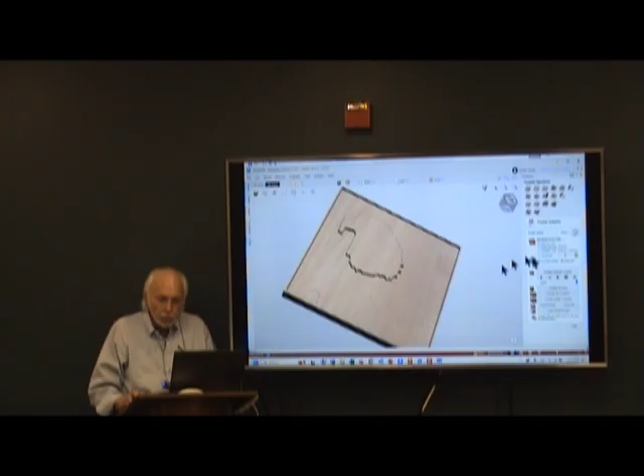Okay. Doesn't look like much. Let's go ahead and preview the selected tool path. Doesn't look like much. But if we look at it on the edge, you'll see that he's cut about 1/4 inch into the workpiece, and he's left some material here for the finer bit to handle. I'm going to close out of this for a moment. I'm going to put things nice and straight again. That is our first execution of the rough cut tool path.

Let's go into the fine tool path, and we're going to see the same four set of controls to determine what I'm going to cut. But I'm using a little bit different bit right now. Instead of the 1/4 inch end mill, here I, by default, went to a 1/16 inch tapered ball nose.

Now, of the bits, there's one in the set that you purchased, and there's one in the set that you have. Chris has a set also. This is probably the most expensive bit in that set. This is a bit that sells in the $50 price range, 50 something bucks. And it can do fine detail work, very fine work. So that is the natural bit that I would choose doing a three-dimensional cut.

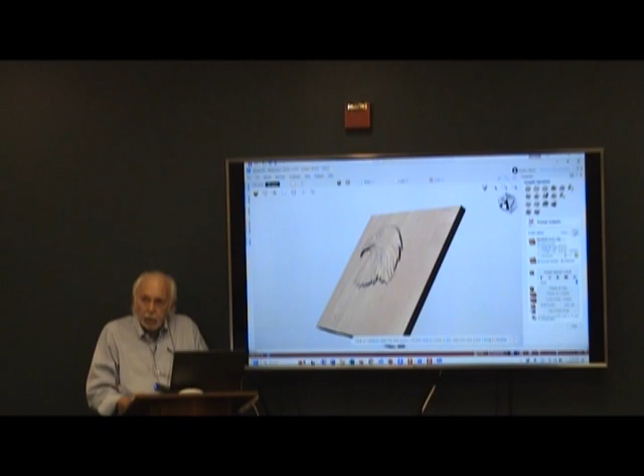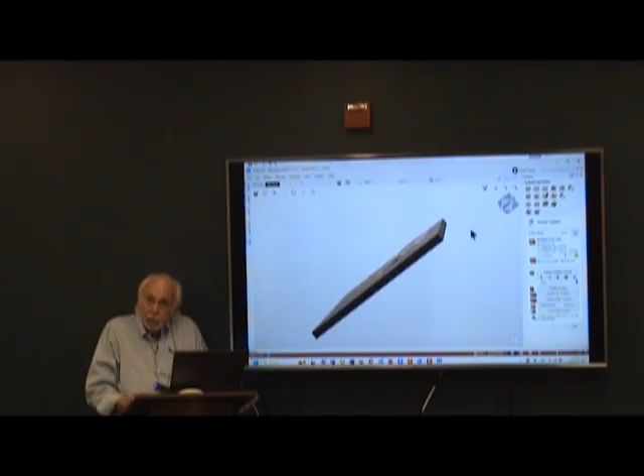Okay, I've got a three-dimensional object that's 1/4 of an inch above the surface of the material, and if I tilt the material, you can see the depth of the device. You can see that the material left is about 1/2 inch. Okay. That's the basics of three-dimensional modeling. That's the basics.

Now, it was really neat when I went through the animals in the clip art. Okay, each one of the animals came, as this one, as an individual component. It came in a dish, and by the way, that's really baked in a dish, so that they are only one tool path. Okay, one component. And then the one that has the jagged edge around. Of course, that one would create the least amount of dust.

Here, by going 1/2 inch into the total workpiece, I've created the most amount of dust, and the dish is somewhere in between. You know, there you are just cutting the material that needs to be removed. I should say the dust that needs to be removed from that material. So now this is 3D. These are the 3D capabilities of the tool, of the system.

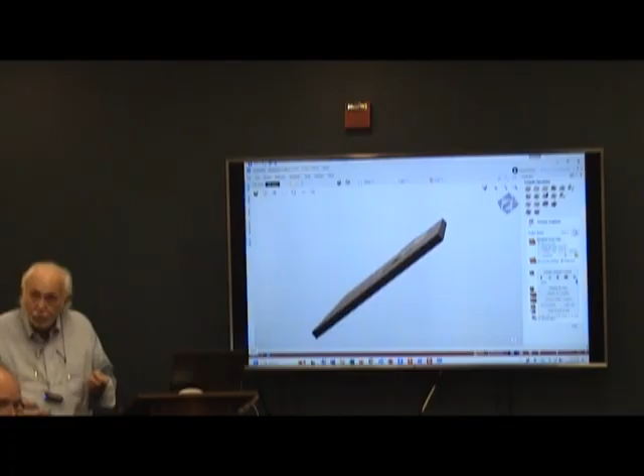I see a lot of questions. What if all I want is the eagle's head? I don't want any background. So in other words, maybe I wanted to make 10 of those and put them on 10 different plaques as I color them differently. Using the tools that I've shown so far, I can adjust the depth of the model. I showed subtracting from the standard 0.47 inch that comes from Vectric. I could increase that to 3/4 of an inch if I wanted to.

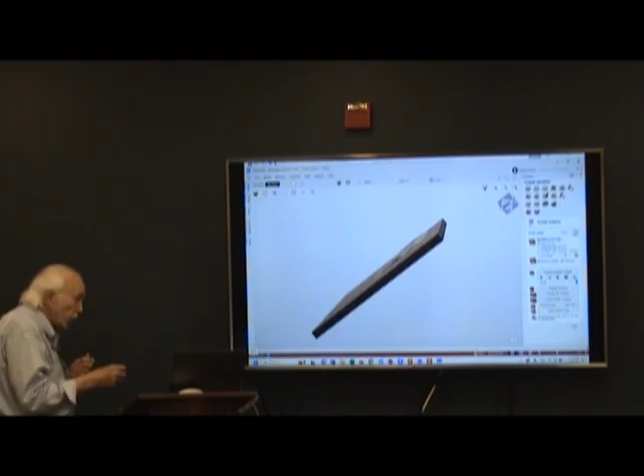Right. So yeah, I could easily, using a 1 inch, cut 3/4 of an inch down and run the bandsaw around it, okay? Or maybe I could draw a vector around and cut it on the machine as a profile cut. So just completely cutting, in this case, the eagle out of the material. Okay? Let me demonstrate that too. I won't fully demonstrate it. I'll show you the technique to accomplish that.

Let's go back into design mode. In this instance, I'm dealing with the differences between 11 and 12. I'm finding the tools in a different location than what I remember.

They've given us at the bottom of the design tab a set of modeling tools, and the one all the way to the left, let me get back here, get into 2D mode. I don't want that, I want that. I only want the component itself selected.

If I go back into the components, if I go back into the design and look down below this modeling tool, did you see the name pop up? It says create vector boundary around selected components. Here I have the selected component, and here I select that tool.

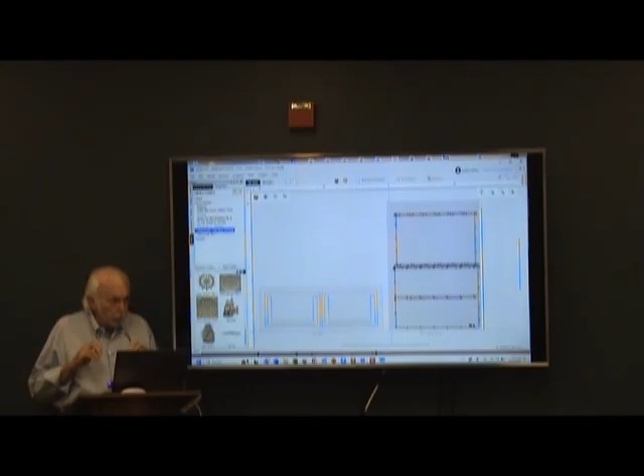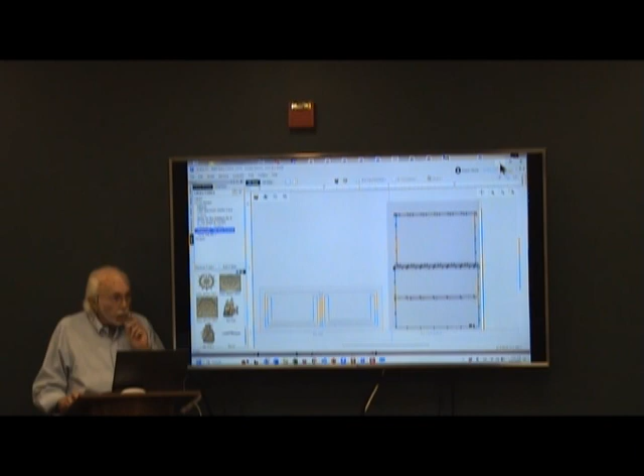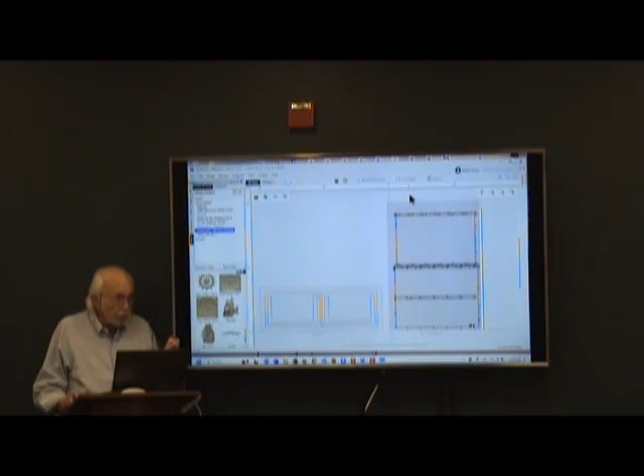I told you last week that it's feasible to export a three-dimensional object from Fusion 360, and I talked about how that could be used inside of Fusion, inside of design and make. Let's just go through that process real quick so that you've seen it.

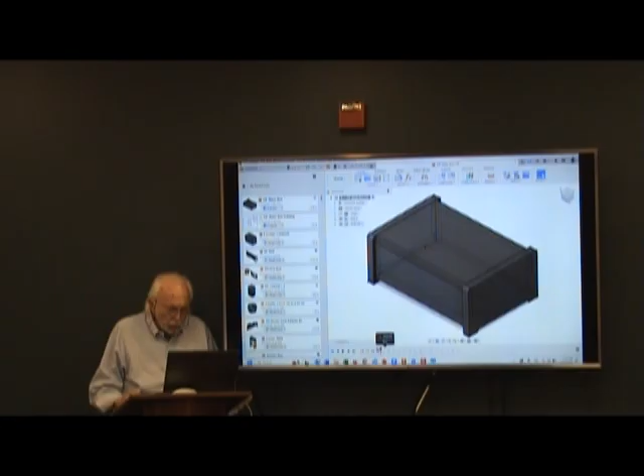In Fusion, I simply set my timeline back to where I only have the left side of a box. Pretty straightforward, left side of a box. In Fusion, I just went and exported it.

I exported it, and I chose—he doesn't like the file name. It's a non-standard Windows file name, and he's just telling us up front. I chose to export in STL file format.

Paul, last week we talked about the STL file format, and it happens to be a surface modeling system where a series of triangles connected together define the outer surface and any inner surface of a three-dimensional object. But I just called it simply boxside.stl. I'm not going to repeat that here, but I'm going back over to Vectric.

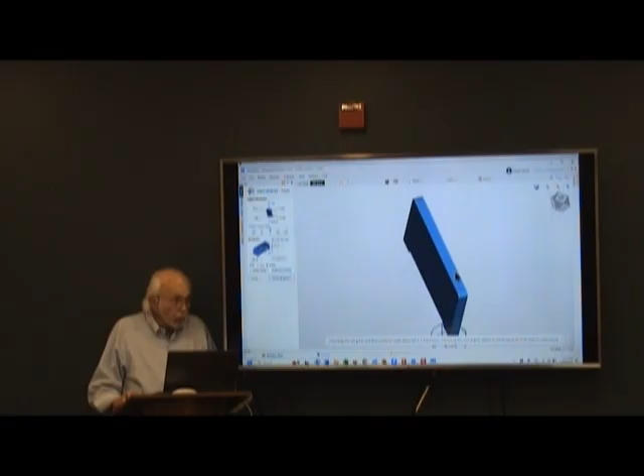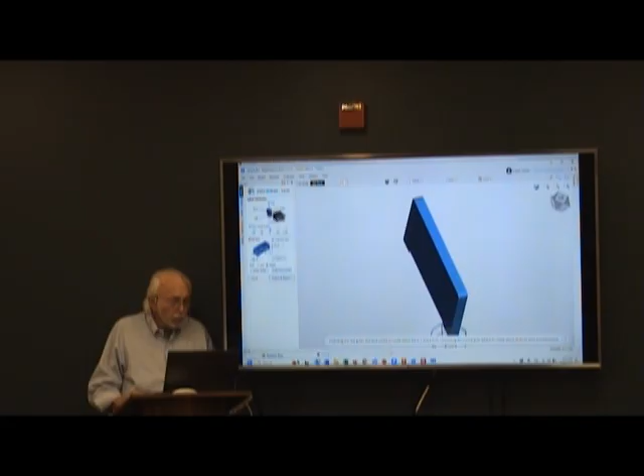I'm going to open the basic boxside.stl file. Now that's bringing a three-dimensional object into Vectric. Of course, at this point in time, Vectric knows very little about the dimensions of this object. It just knows, looking at the STL data, the shape, and it knows where it has a mortise cut in it.

There are tools available in the Vectric software to adjust the dimensions of this file we've imported, of this object we've imported, to set it up inside of Vectric with the right thickness and other dimensions. It turns out that one of the homework assignments tonight will be a Vectric presentation on doing just that for a little statue. And the statue happens to be—let me back out of here for a second.

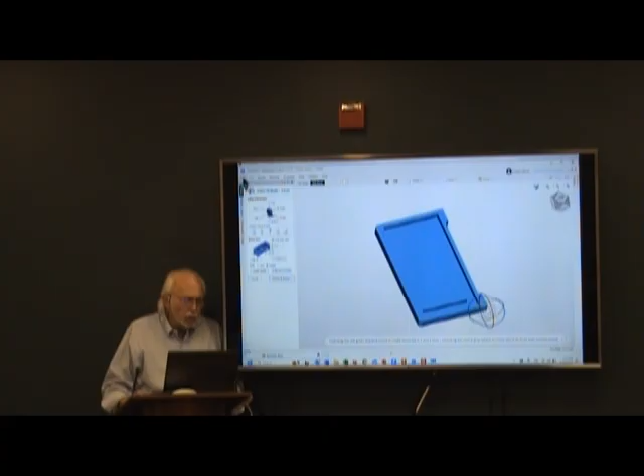Okay, I'm going to do another load using the same icon, but this time I'm going to select a file that ends in the OBJ format.

Okay, so now I've brought in a little statue of a marlin jumping out of the water. The same process would be ahead of me as with the box side. I now have to adjust this model to where it would fit where I want it in a piece of material.

And then cut it as a two-sided object. The Vectric video to import this particular object and convert it into a two-sided cut is part of the homework tonight. I've demonstrated the practicality of taking a model out of Fusion 360 and bringing it into Vectric, and the practicality of grabbing an object from industry someplace and bringing it into Vectric. The details of the homework tonight will take you through the process of, once you get it into Vectric, how do you go about making it into a tool path?

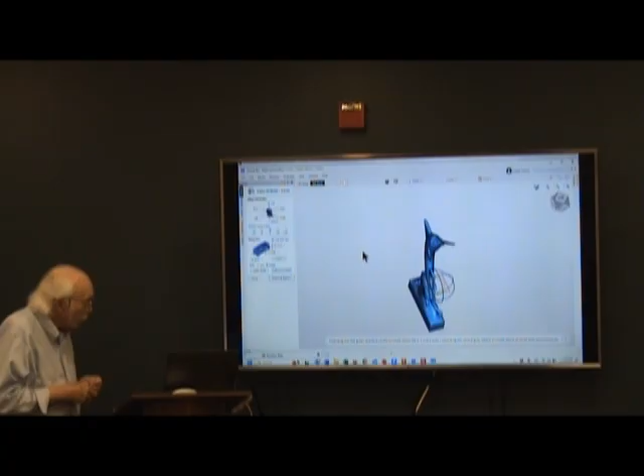Going back to my guidelines of what we want to speak about tonight, I've talked about vector imports, and I've shown you the available box designs on joesboat.org. By the way, a high percentage of those pre-configured boxes are three-dimensional work. I promised earlier that we would talk about manipulating 3D models and doing some merges.

The ends, there's some cleanup work left to be done here, showing a three-dimensional rose on each end of the box. Here is the cut of the box front, back, and top. On the box front, a floral design, I picked it because I thought it was appropriate for a wedding here on the front of the box. And then for the box top, I chose a design coming from a video that's out there on YouTube.

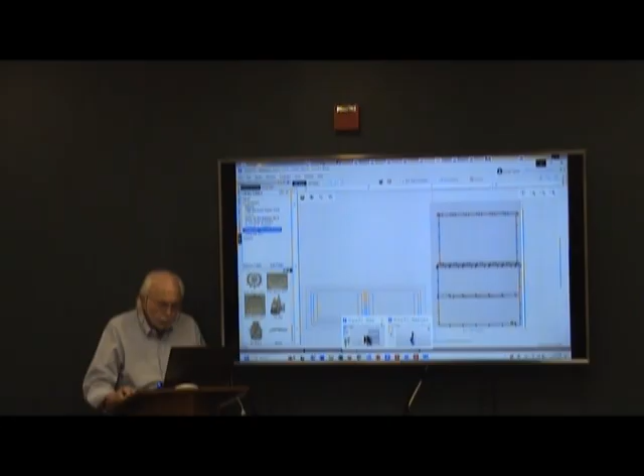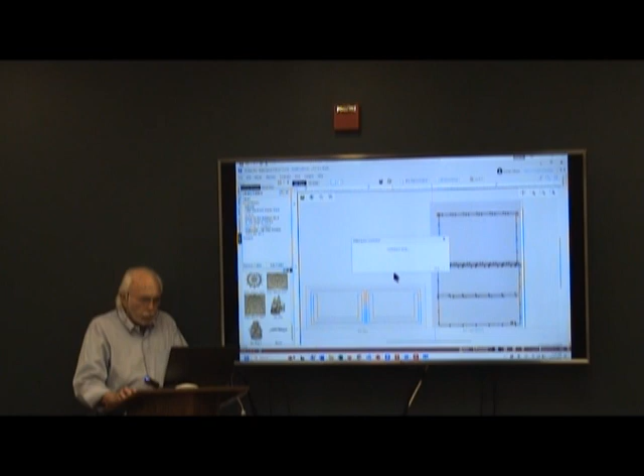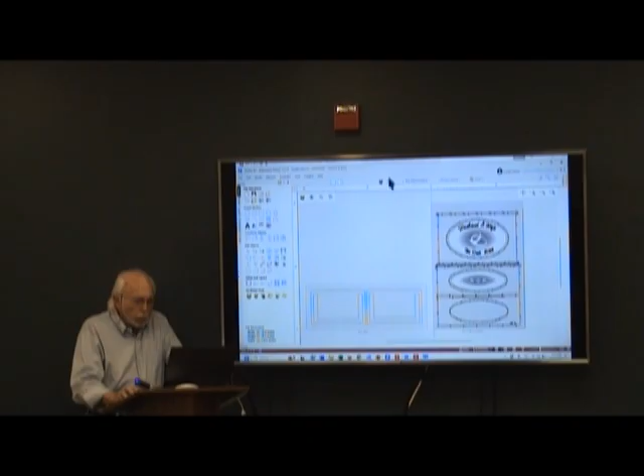That's not it. Okay, just to synchronize here, we've got the floral pattern on the ends of the box, and simply an oval around it so we can V-carve a ring around it. Now this is simply loading that design and make object, which comes with the dome, and similar steps to what I demonstrated earlier. When I go over to the tool paths for these two ends,

oh shit. Technical term? Yep. Maybe we'll create a few tool paths here. I was worried about filling up the time tonight, and those worries were nothing.

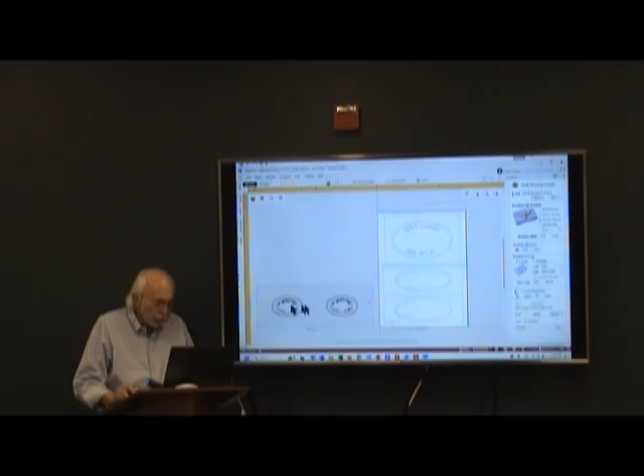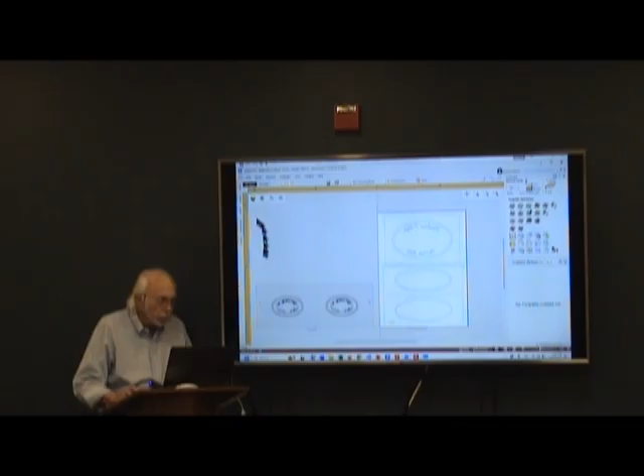Let's go ahead and create a tool path. Let's see. Keep in mind there are two sheets in this file. We covered sheets 2 weeks ago. I have a sheet for the box ends, and I have a separate sheet for the top, front, and back. Here I'm just simply going to select the two roses, and I'm going to open up a 3D roughing.

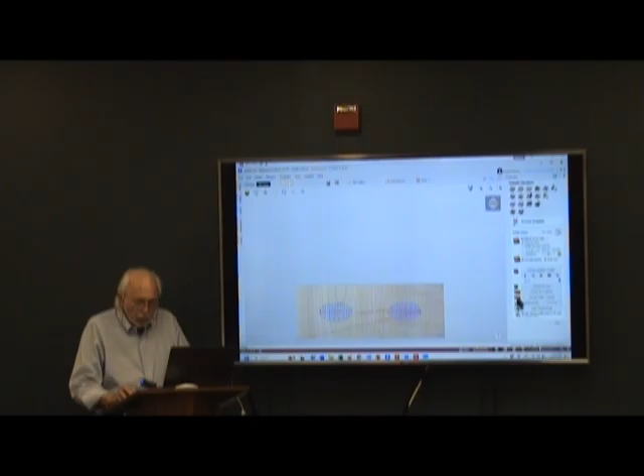And here I use selected level. Level 1. They're both in level 1. I have level selected here. Let's see what happens when I calculate. Okay. This is the roughing tool path. And I preview it, showing you just a gross outline. If I close out and I go to the 3D finish, and I go into 2D, and again I've selected level 1, and I go through the calculate, and then I do the preview.

Okay, it's going through. Now there were some questions earlier, and I can do this for either the finish or the rough cut. I think it's the same. Let's do the finish. The two patterns that we discussed are offset and raster. Now, raster, of course, is the one that's going to go back and forth, and you can choose the angle. Here I chose 40 degrees, but let's choose 90. And that should change the direction it goes across the wood. Let's go ahead and calculate.

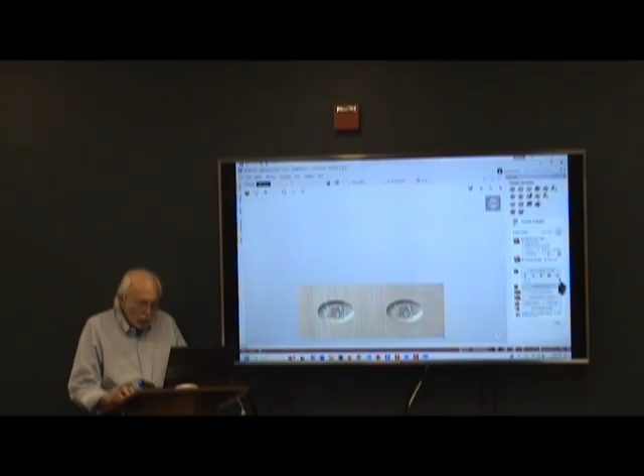And now this is a finish tool path, remember. Let's go ahead and slow down the cut, and then do the preview. I didn't slow it enough. Maybe I did. Let's speed it back up so it'll quickly finish. What happened is I did not reset the preview. Let's go ahead and repeat that. Let's slow it down. Let's say preview selected tool path. And now you can see how the cut is occurring. It's at the 90-degree level, and it's going to go right to left over the entire design. You can see the rows beginning to appear here.

Because I'm doing this in the simulator, I really don't care about the rough cut. There's no chance I'm going to dull or break this bit. I mean, it's going to occur in the virtual. Okay, so of course, let's speed it up.

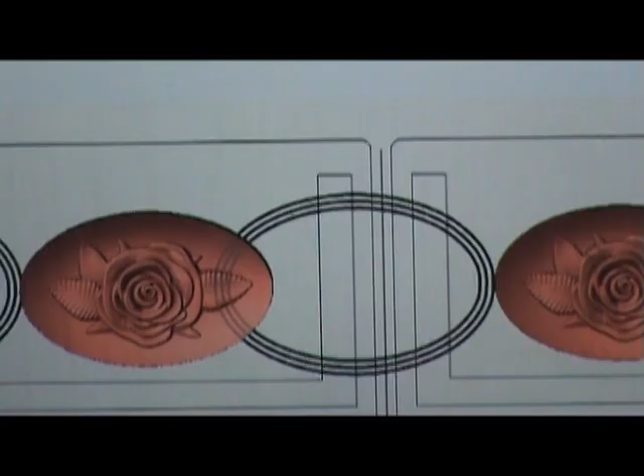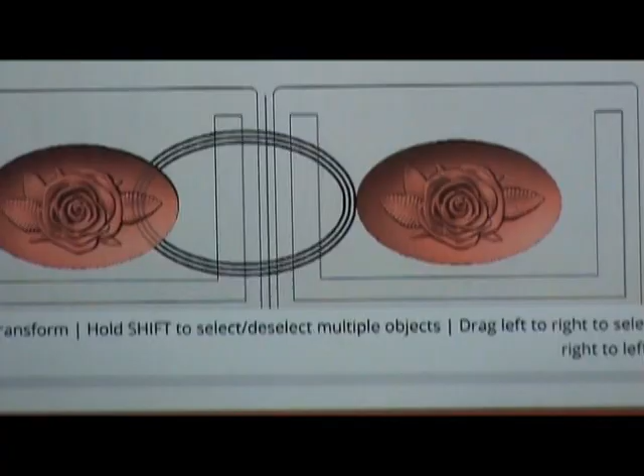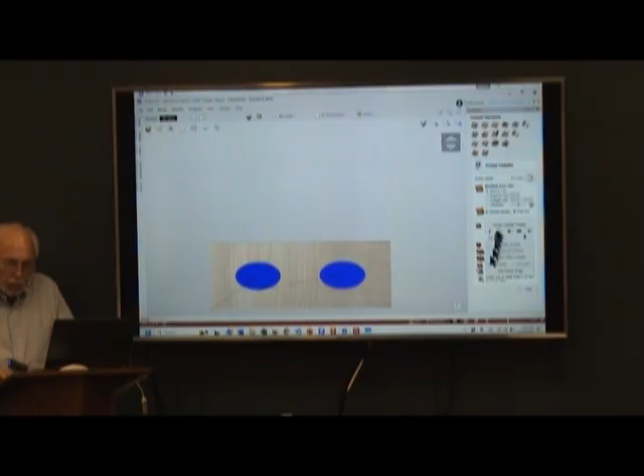Now, just for demo purposes, I'm going to redo it, and I'm going to choose the offset pattern. Notice it's showing a circular pattern. And I'm going to calculate it. I'm going to reset the preview again. And now let's go ahead and preview that tool path. So make sure it's slow enough here. You can see it starting from the center, working its way out. Okay.

Don't believe the predicted machining time for these tool paths. Multiply it by 3 or 4. These are long jobs, very long jobs. Is there an advantage of one over the other? I haven't found it. I have not found it. Speed isn't one of them. Maybe if you use both of them, when you go to the cleanup, is where you might see the differences.

The circular patterns, you might not need to sand as much with the circular patterns as with the diagonals, but I truly don't know. Okay, so here we are. We're just cutting straightforward design and make components.

It gets more interesting when we get over to the box top. And let's close out of here. Let's go back over to, from the box sides, let's go to a different sheet and get into the box top front and back. Here we are in the 3D view. And here's where we do not have, let's get one. We do have tool paths.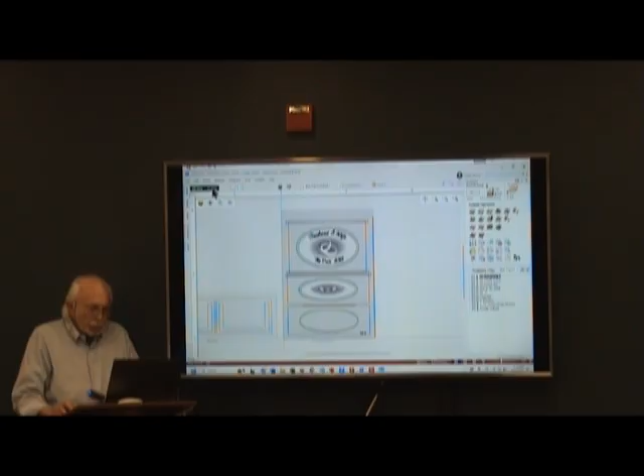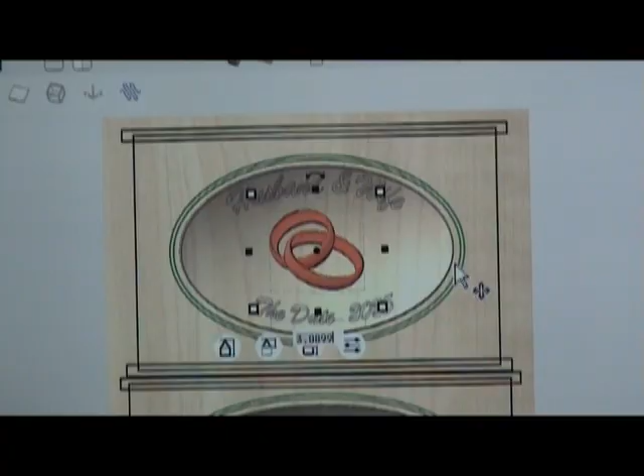I'm going to start in the three-dimensional view because we've covered already several of the controls. When I select in 3D view and do a second select, I have a similar set of controls that I've already discussed. Here, the pattern for the rings, let's get some detail here. I got 3 inches high, the rings, and I've got 2.6 inches high and 3 inches wide. That is the component for the rings. And as I said earlier, this is just a standard clip art that you can easily load.

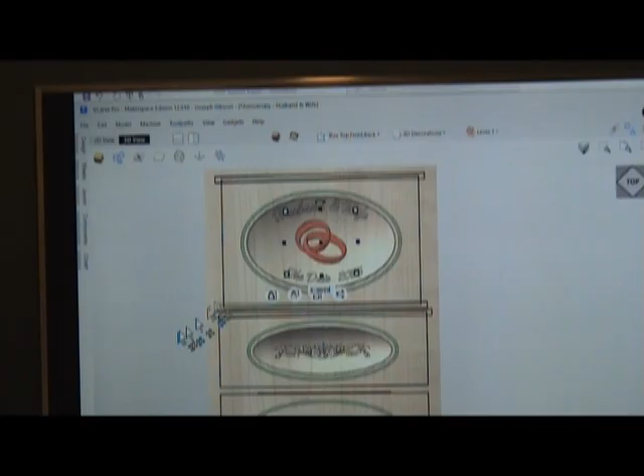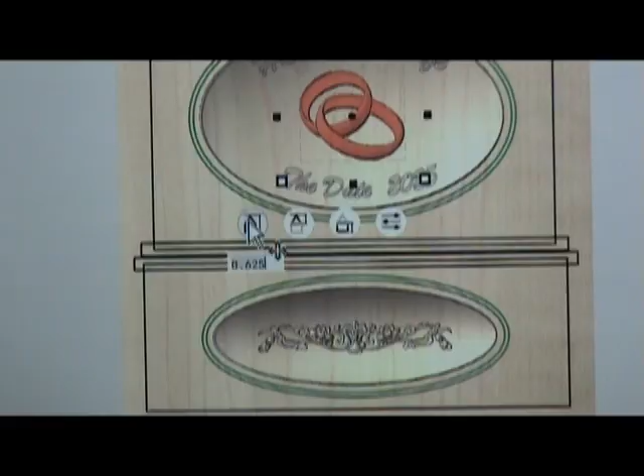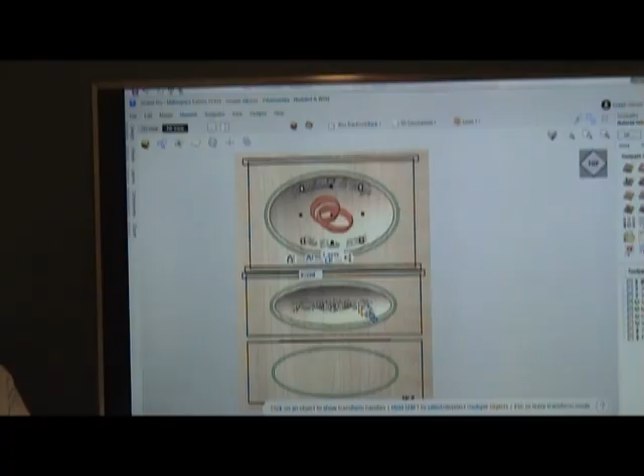Down below, if I look at the details of this, that component is 0.625 inches high. And if I look at the total for the rings is 0.125 high. Doesn't make sense, right? Doesn't make sense. I don't try and modify them. This is the point I made earlier. Just accept them at face value. If I look, now I'm just showing the component for the rings itself.

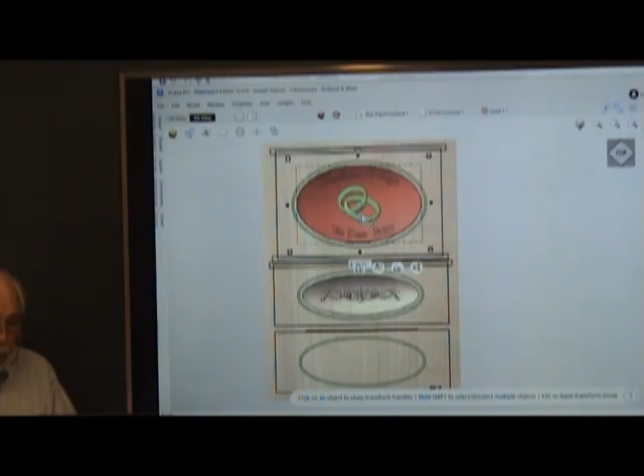If I move away and I focus on the dome, which is inverted to become a dish, we'll talk about that in a few minutes. Here I have a width of 8.96 inches and I have a height of 5.55 inches. And then if I look, I'll select them again, if I look at the thickness, it says 1.825 inches. Don't believe that. Don't believe it. But it works. And if I look at the total, it's 0.4 inches. Okay? It works.

Earlier, when we were talking about the eagle, I went through these controls, I skipped a control called the base height. Okay, now think this through. For a given component coming from Vectric, it's going to have a standard width and height, and it's going to have a standard thickness. Now placing that in the thickness of the wood, I used the defaults earlier, which work, by the way. And for a single component, it's rather easy.

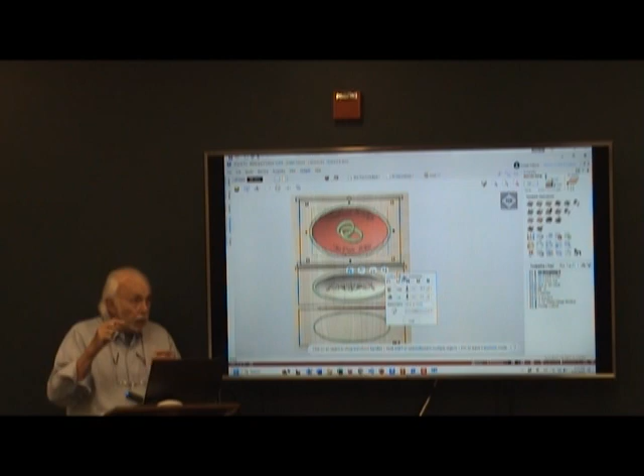The base height of 0.25 might make sense, or a base height of 0.375 might make sense. Halfway up the thickness of the wood, okay? And then on top of that, the height of the component itself. You see the tools we're going to manipulate to build the composite component that you want for your project. Now, for simplicity's sake, for me, I got to make it as simple as possible. I'm choosing to work with 2 components.

But there are no limits. You can put together designs with multiple components. Say you're not dealing with a box, but you're dealing with a plaque. Yes, you can load that plaque up with little components, which the videos tonight will do. They will walk you through the steps of building a composite set of components from multiple objects.

Joe, you haven't talked about the lettering there. Since it is now a bowl-shaped surface, do you have to do anything additionally to the letters? Let me talk to that a little bit. I will talk to that. Okay.

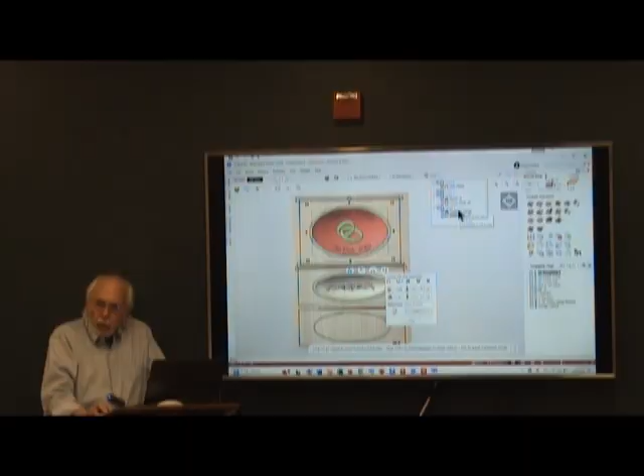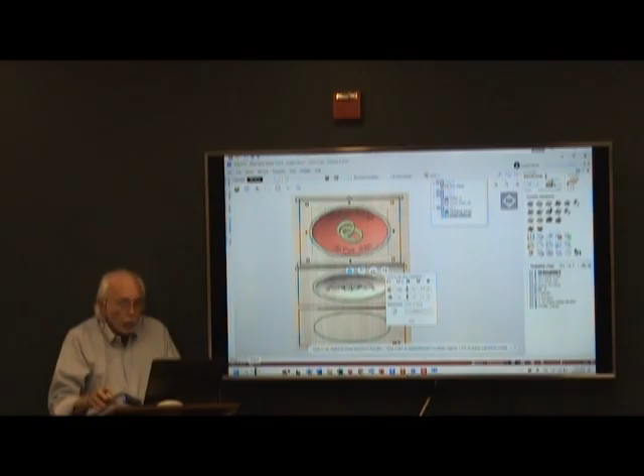When I look in the component tree, the dome dish 30, right beside it, there's a U. When a dome comes out of the box, that is going to be an inverted U. The act of turning it over inverts the dome to become a dish. And this particular one does not have any color to it. It's simply black and white.

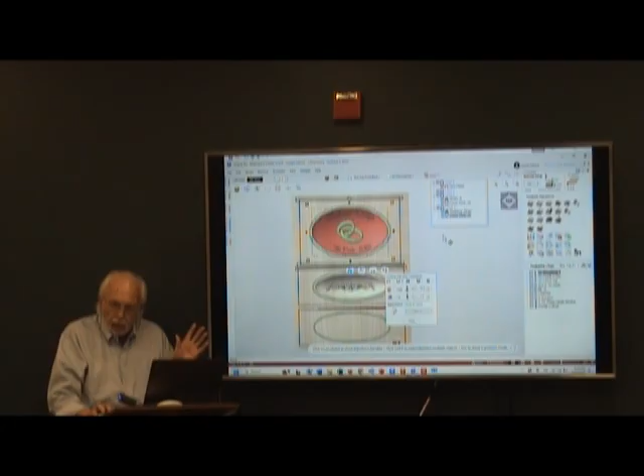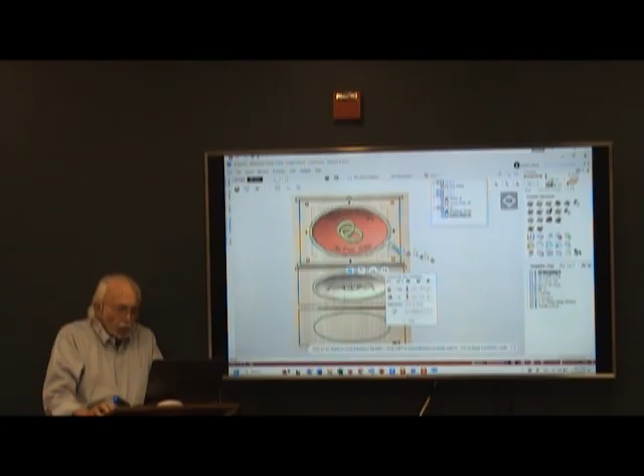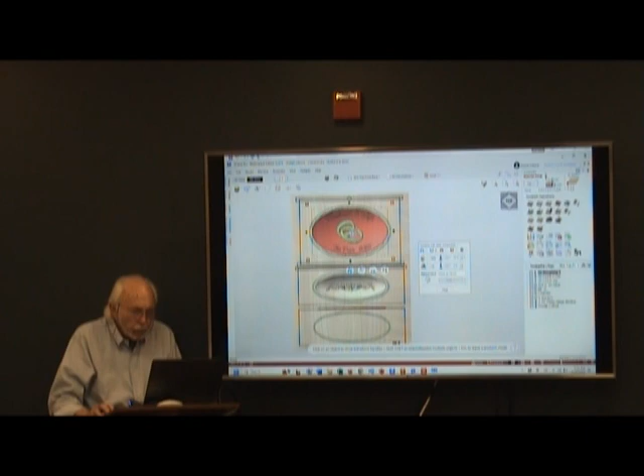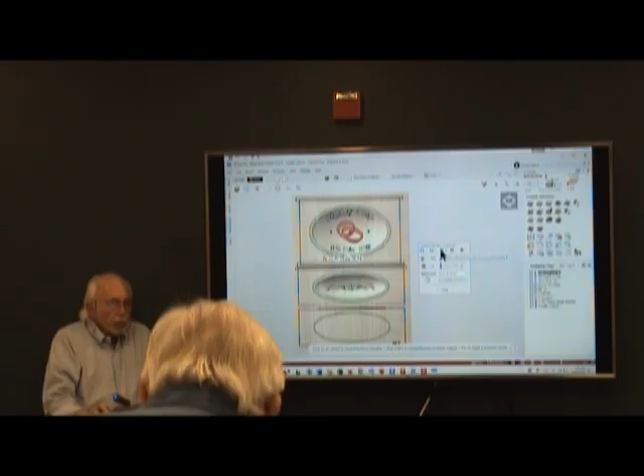And by the way, if I go back over... Now here I get version 11 versus 12 issues. And instead of going to the left-hand set of controls for the currently selected... okay, the rings. Notice the rings themselves, instead of the plain black and white, we have the color, the greenish yellow color. As I have an inverted dish, the color indicates this is a merger of a component on top of a dish. And there's conversation in tonight's homework that will get more detail there in the flat inserted versus the merging in.

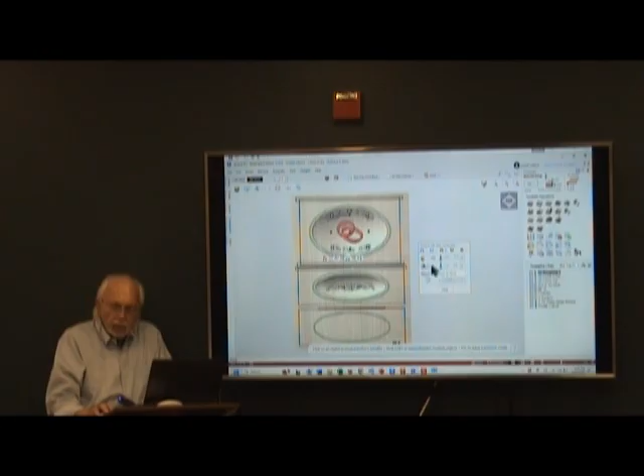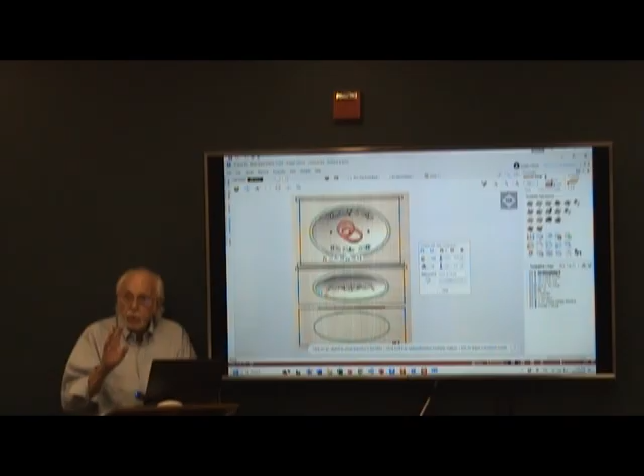Okay, this is the new method of manipulating the details of a component. In addition to specifying how I want that component to be recognized as either a base unit or a merger, I can also fade and tilt. The tilt gives you some very, very tiny degree movement of a component up and down. Is up and down the right word? No, back and forth. Technically, they believe they can make one end of a component higher than its normal position. And the fade, of course, is also not using the full component, but getting rid of some density there.

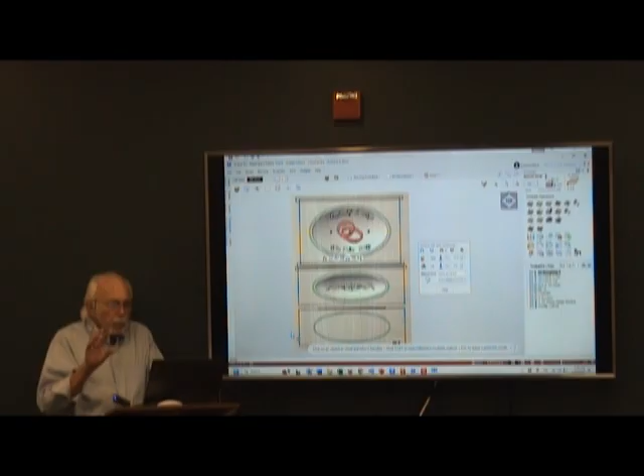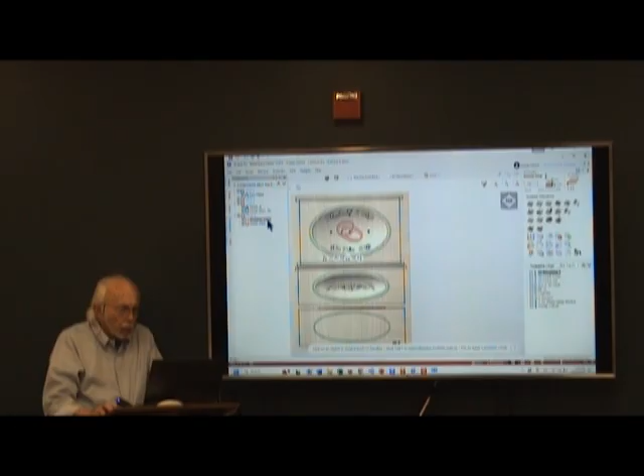Let's close out of this, and I want to fully close it. Go back over to the components tree. And here it's the same thing. If I go focusing on the wedding rings, I've selected it as I did earlier, but now instead of having the pop-up dialog box, I've got all the dialogue here in the left-hand column. Now, for an individual component, I have a selection as to how it's to be merged in. But notice they sit in layers. I got layers 1, 2, 3, and 4.

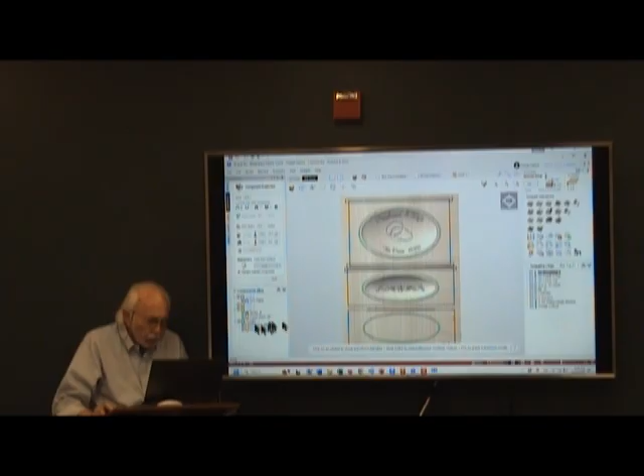The layers themselves, the levels themselves, also have a combined mode control. Add and subtract. Add would be the upside down U. Subtract would be the U itself. I have a merge, which I think is an upside down U, and I have a low, which is... I forget which one. Where earlier we looked at the icons, the U with or without color, or the upside down U with or without color, here at the layer level we're using add, subtract, merge, and low instead of the 4 different icons. And we're adding the term multiply. Between layers, in this particular design, there is no multiply. They're all pretty straightforward inverted U going up.

But in the homework tonight, there will be conversation about using the multiplier effect between levels. There will be a multiply effect that can manipulate the depth of a component so that it stays within a particular set of parameters. And I'm not sure I can fully explain it to your satisfaction, so I'm going to say, wait for the video tonight. And I'll point that video out.

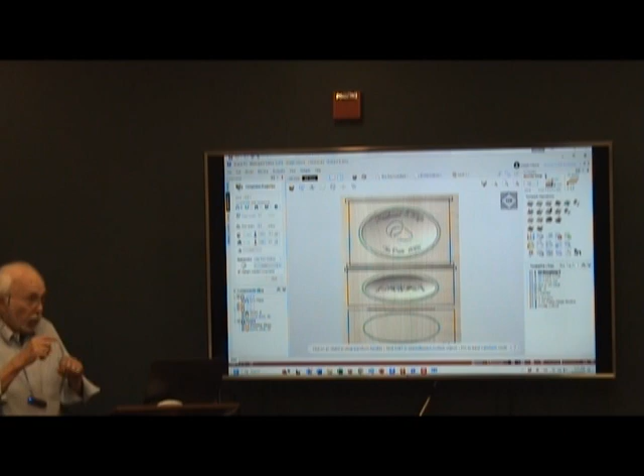I'm serious. The videos you'll watch tonight will describe the zero plane as a reference point for the surface of your composite model, and it is to help the software understand where that model should end. You'll hear those words tonight. You will not find that backed up in documentation. Okay. All right.

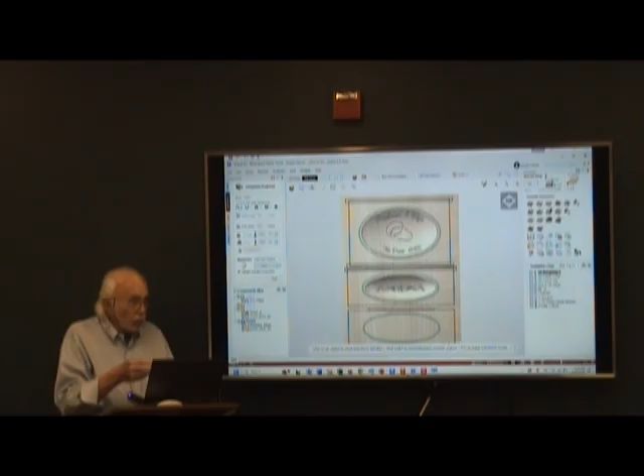So we have covered the level structure. Through talking to the level structure, you can see how it's used. I've put a composite model at one level for the box top, and a second composite at a separate level for the box front. And then the software, as it merges things together, will pick out levels as needed by the tool paths that we create.

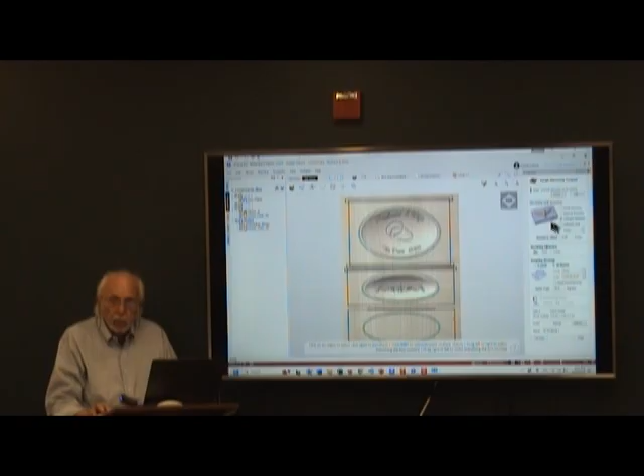And here I get over to the 3D tool paths for the anniversary box. The 3D roughing 1, finish, and finish top. Let's take a look at the 3D roughing 1. Okay. It is selected vectors, and there is a faint magenta line around husband and wife, and there is a faint magenta line around the floral pattern. So I have a tool path that does all of the roughing work for the front of the box and the top of the box.

And let's close out of here, and let's go to the 3D finish. Here we chose to do a 3D finish for the front of the box. And if you see, we are choosing selected level here. So anything on level 2 in the tree will be handled in this tool path. Back out of here and go back into the finished tool path for the top of the box. Again, we're doing selected level, and I think you're going to see this is level 1. Okay.

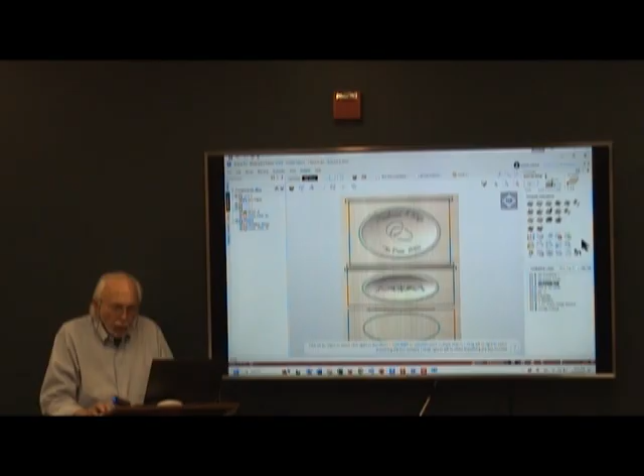Now, if I go ahead and exit out of here, close out, recompute everything. I've got an error. It doesn't like the total thickness of the model, and I'm going to see if I can cut it down to 0.625. Apply. And it took it. So close out. And let's say OK here. Recompute everything.

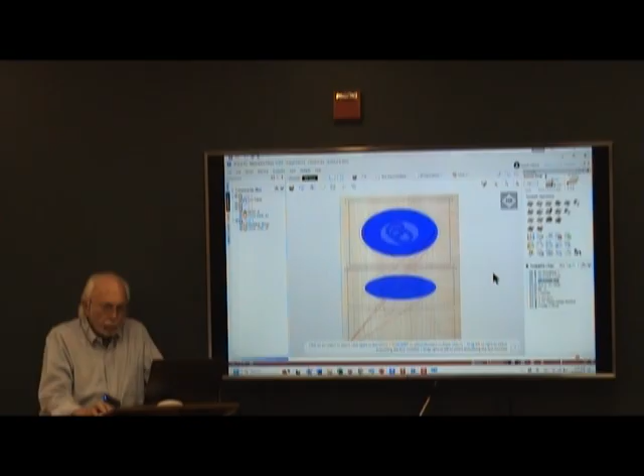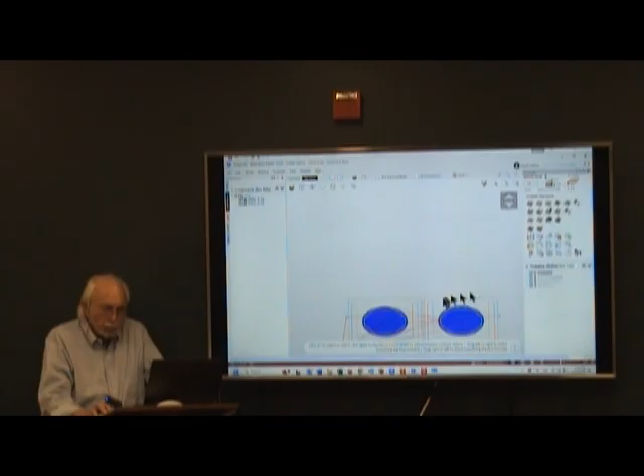And let's go ahead, again, we're recomputing everything. Go back into the preview tools. Reset the preview. Preview all tool paths. It's doing the rough cut. I'll speed it up just a little bit. The rough cut. You're doing the finish work. Speed it up a little bit more.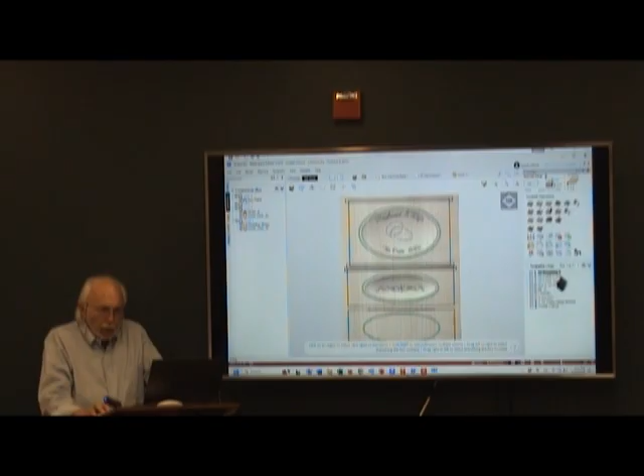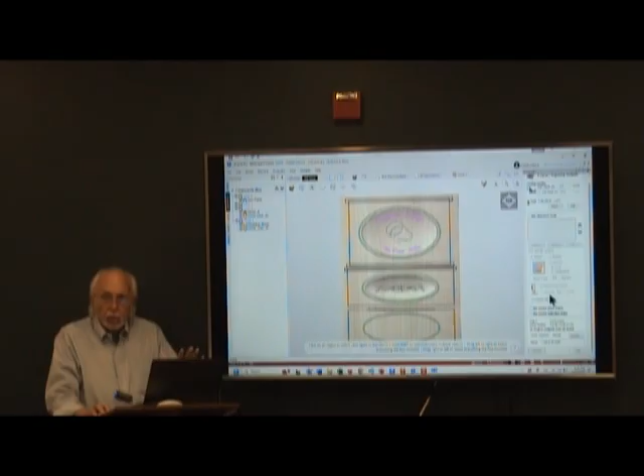Now, a question earlier had to do with the text, the way it's cut into the side of the component. If I focus on text in 3D shell, I can see that husband and wife is selected, the date 2025. Here, this is a straightforward textual tool path with one exception. Project tool path into 3D model. Okay, so I'm telling the tool path that it has to figure out the slope of the dish in order to cut the text.

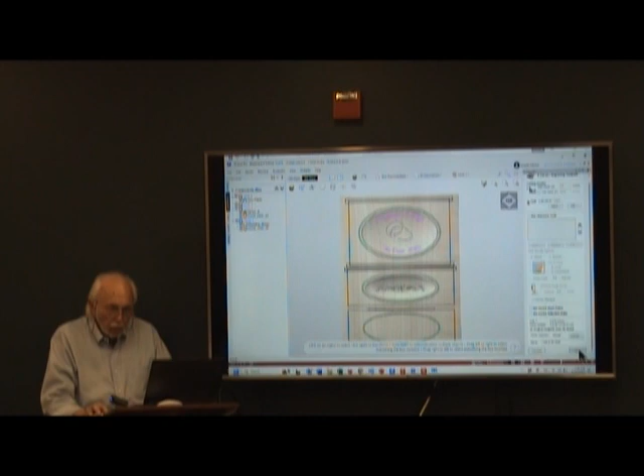Okay, I think I've completed all of the tasks that I had planned. We've covered the anniversary box. It is a provided three-dimensional file included in the class folder on joesboat.org. And I've talked about the 3D toolpath generation, and we've demonstrated that.

The other thing that could have been on the menu tonight was a walkthrough and some work in the wood shop. That time was not available, so we'll pick up there next week. My goal is to take one of the cuts that we have and demonstrate breaking it apart, getting rid of the tabs, fitting the box together, all of the steps that you would need to take, including some clean out of the 3D carving, to get ready to assemble a box. We're not going to actually glue a box next week, but we will cover all of the dry fit that's needed.